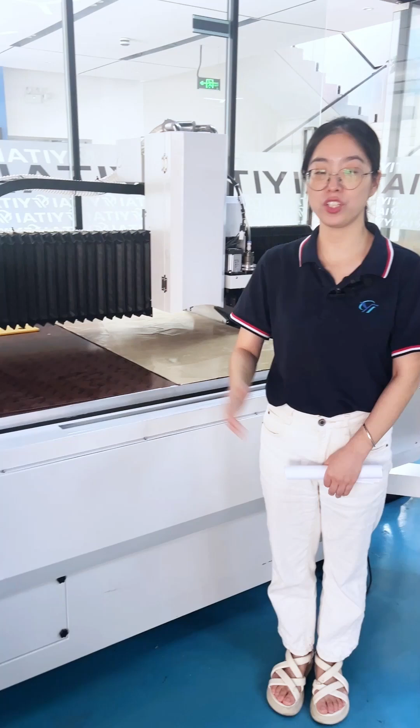Just now we did a live show and introduced our sandwich die routing machine. And now we continue to introduce its brother machine. Why call it a brother machine? Because both machines are for high precision dies. That machine can mill the steel plate, and this machine has a similar function and can process the pertinax, the rubber, and also the plywood. The non-metal materials for this machine.

If you are a box factory manufacturing cigarette boxes, pharma boxes, I mean medicine boxes, and cosmetic boxes, and if you are a die maker making dies for this kind of box, you may use this kind of machine. Our pertinax machine is mainly used to mill the pertinax. Except the pertinax, it can also mill the rubber and also the wood.

As time is limited, today we want to show you the details of how our pertinax machine cuts and mills the pertinax. Some may wonder what the pertinax is. In my hand, this is called the pertinax, and the brand is Reuma, made in Germany. Other brands are also okay, like Cito or other Chinese brands, both available for our machines.

The thickness is very thin; the normal thickness is around 0.5 millimeter, 0.6 millimeter, 0.4 millimeter. All these sizes are suitable for these machines. Before starting the process, I want to give a brief introduction about the whole design and structure of this machine. In front of us is the main body and the table of the machine. The table size is 1.1 meter by 1.1 meter. We customized the table size according to the normal size of the pertinax in the market.

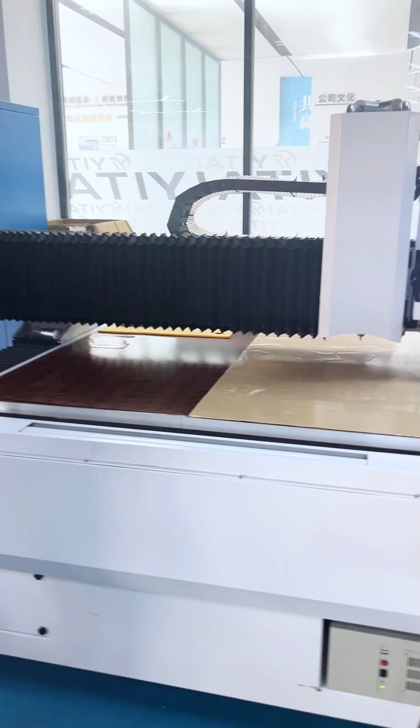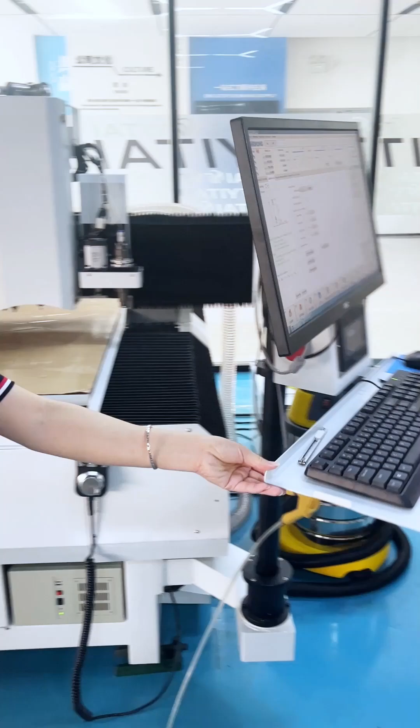This is the head of the beam. And this is the spindle. This is the cutting head for the rubber. And beside the table, this is the operation panel, which can rotate freely from different angles, according to the space of your room, with the monitor, with the keyboard and mouse.

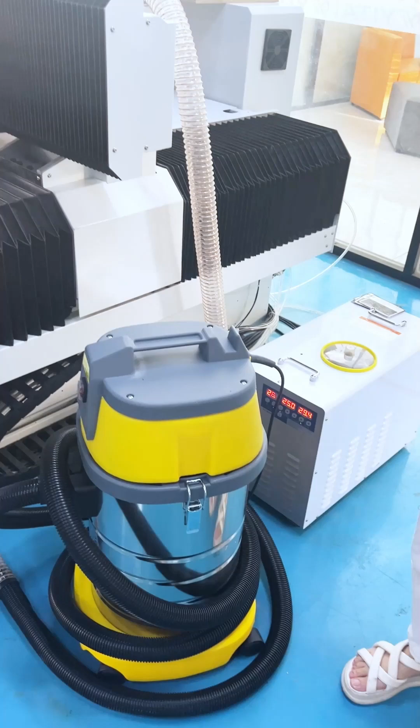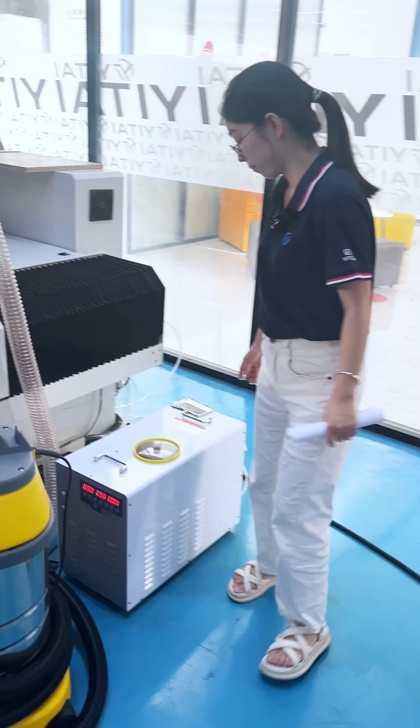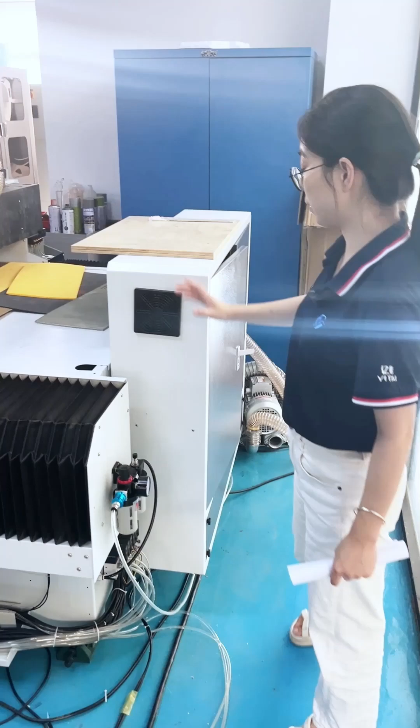And this is the dust cleaner to absorb the dust. Because during milling the pertinax or the plywood, there will be a lot of waste and dust, so we use the dust cleaner to clean it automatically. And this is the chiller for cooling down. On the back of the table, this is the electronic cabinet.

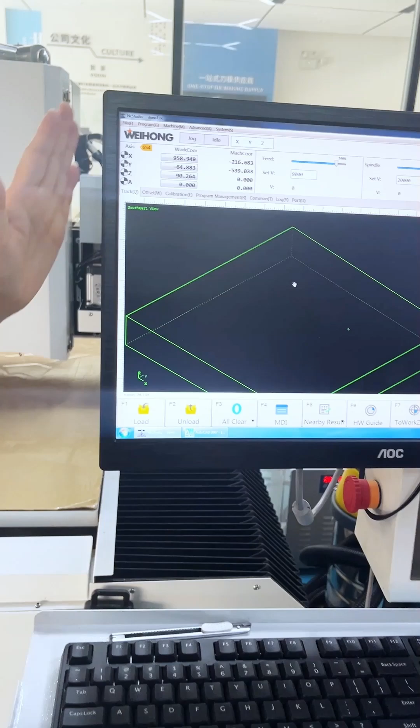The construction of the machine, I mean the components of the machine, is very simple, and it does not take too much space. So it's very convenient for the operators or workers to operate and it saves space. Now it's time to operate the machine. Our engineer will first show us how to load the file and input it into the software. This is the interface of the software. So we choose one file and open it to input it.

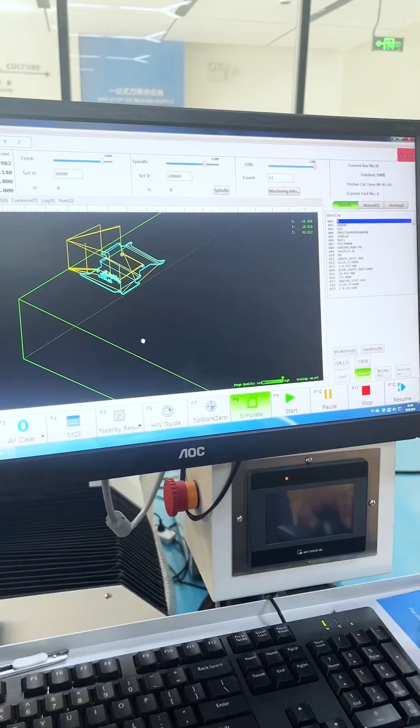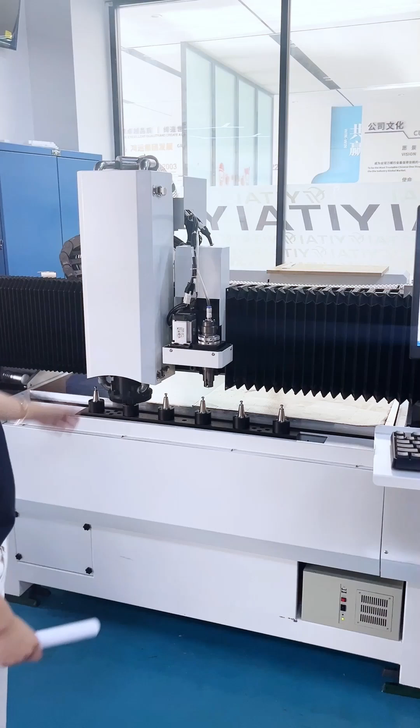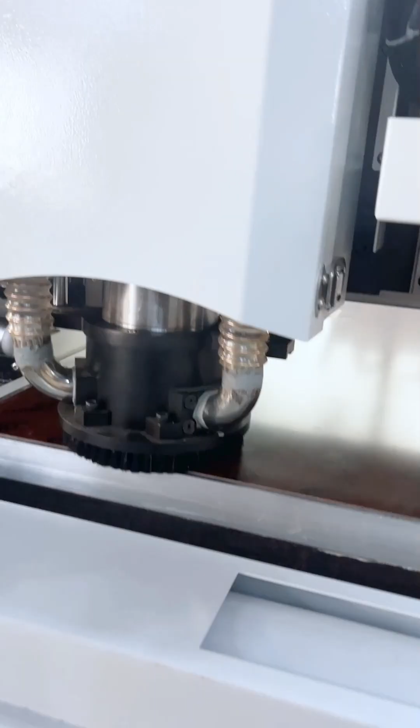This is the distance we set from the 0 point. This is the file which we already input. In the hand of the engineer is a control panel, which can control the moving of the head. Total 1, 2, 3, 4, 5, 6. Total 6 auto tool changers to change the tool automatically.

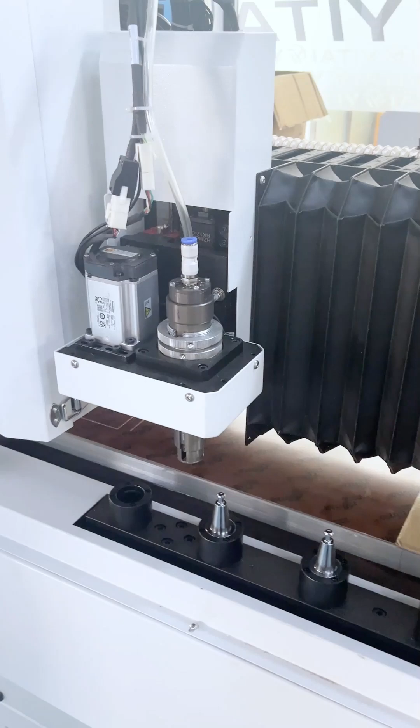The machine changes to another milling tool to continue with the second layer. We use the trimming blade to continue with the trimming process. The second layer finished. We continue with the third layer. This time, it goes back to the 0 point. The third layer is drilling the hole. Wow, it's very fast. The hole drilling process finished.

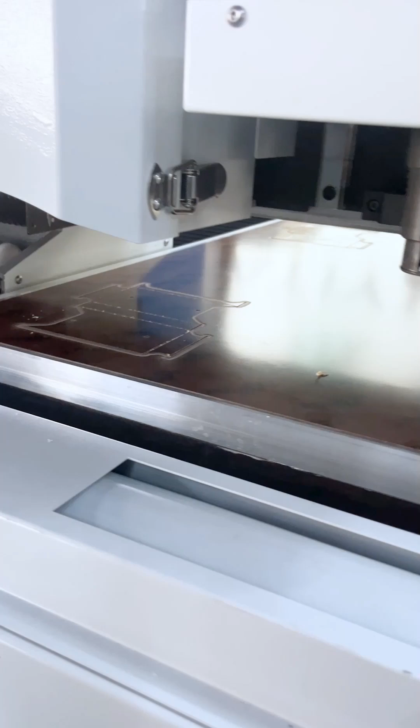We continue with the fourth layer. Go back to the 0 point and then start. Okay, we cut the hole. Now we finished the marking job.

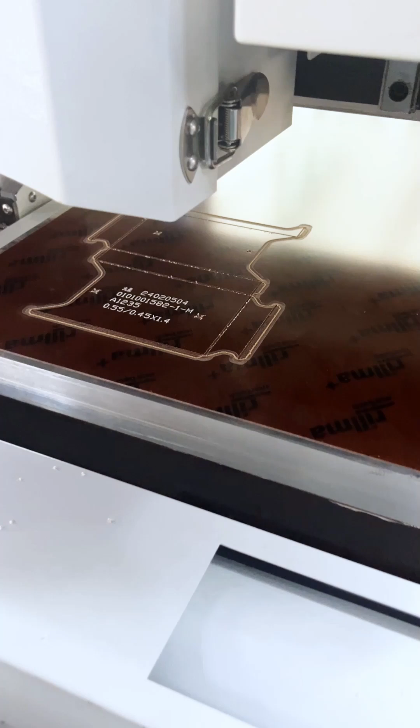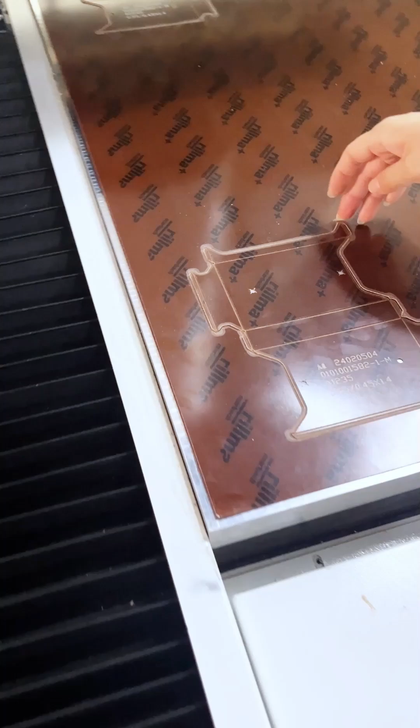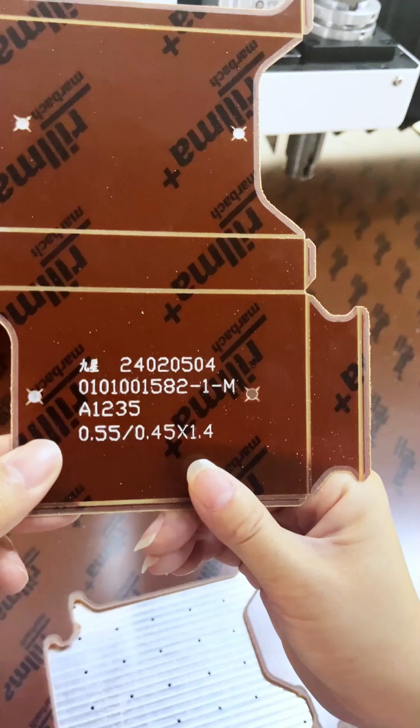Okay, one piece of pertinax sample finished. It takes 5 minutes and 15 seconds in total for one piece of pertinax. You can see the high efficiency of our machines. We can take it out to have a look at the pertinax we just finished cutting. This is the back side. You can have a close look at the line. We use different kinds of tools to process different layers and different lines.

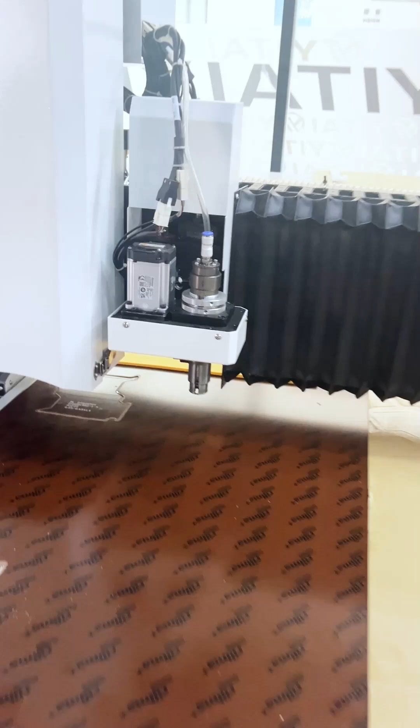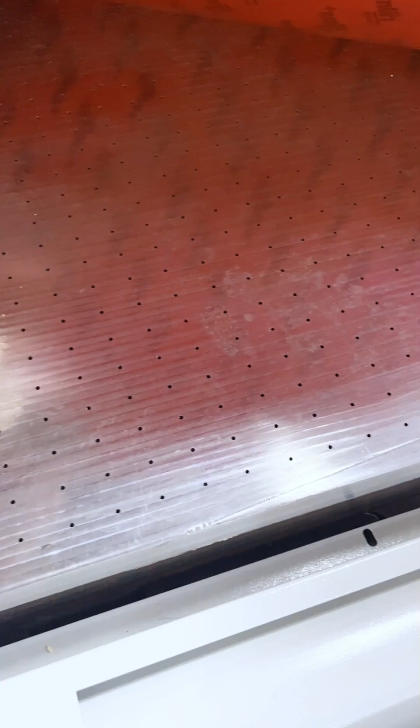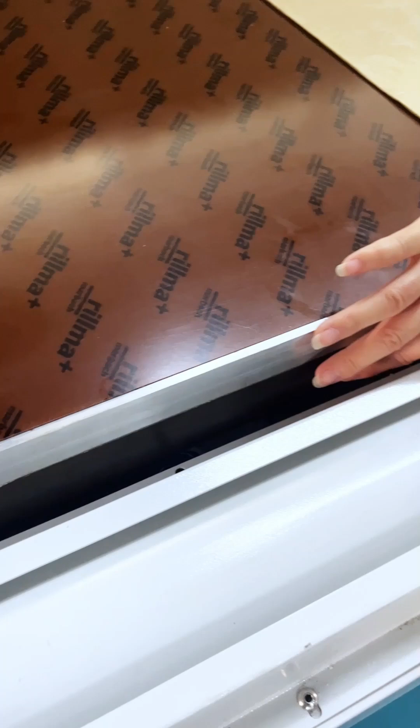And we can have a look at the detailed structure of our machines. The tabletop of our machine is aluminum, and the thickness is 50 millimeters with vacuum on the top. We can have a close look. And on the bottom of the aluminum table, it is marble, so we can ensure the stability and durability of the machine.

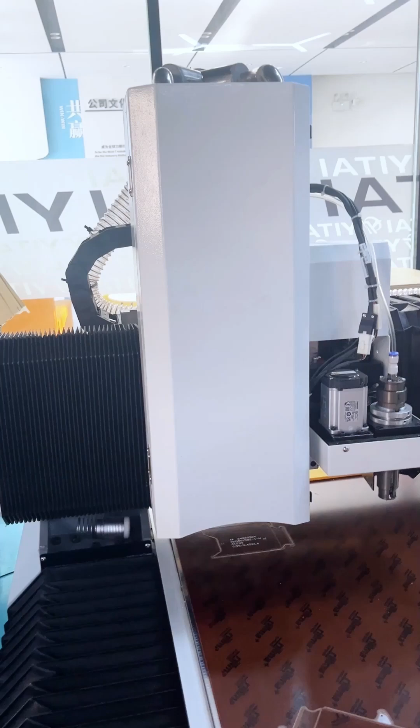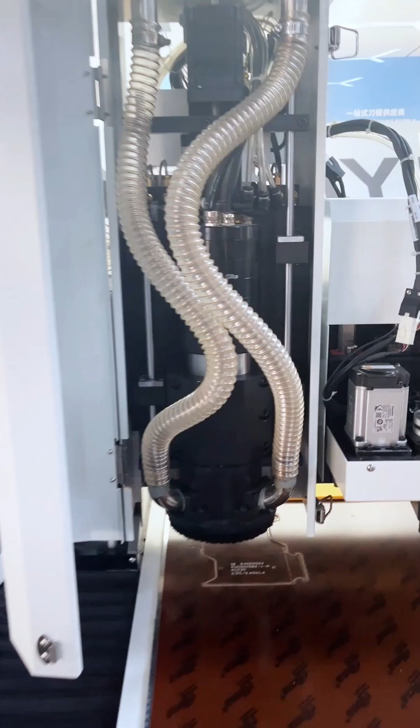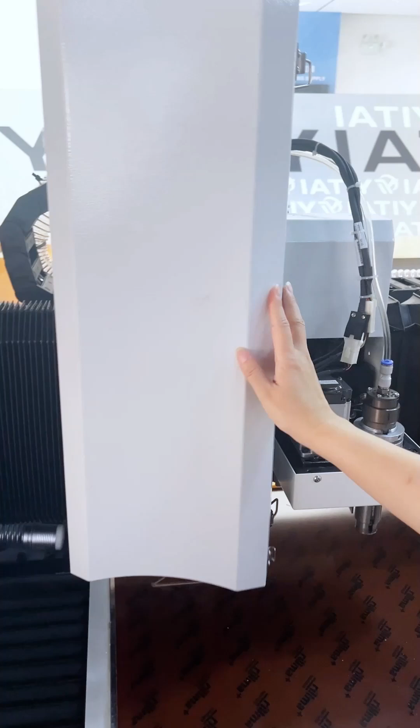This is the spindle of the machine. We can open the cover to have a look at the spindle. The spindle speed is 40,000 RPM. It's very high speed. We can have a look here. Beside the spindle is the oscillating tool to cut the rubber.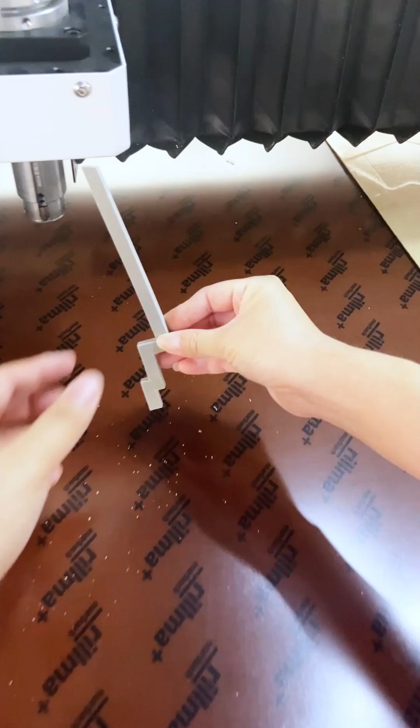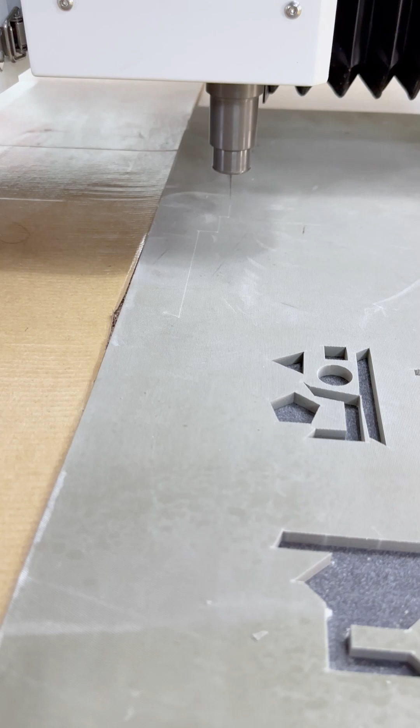And the drive and the motor. This is the drive and motor from Japanese Panasonic. This is a Japanese Panasonic driver to control the oscillating tool.

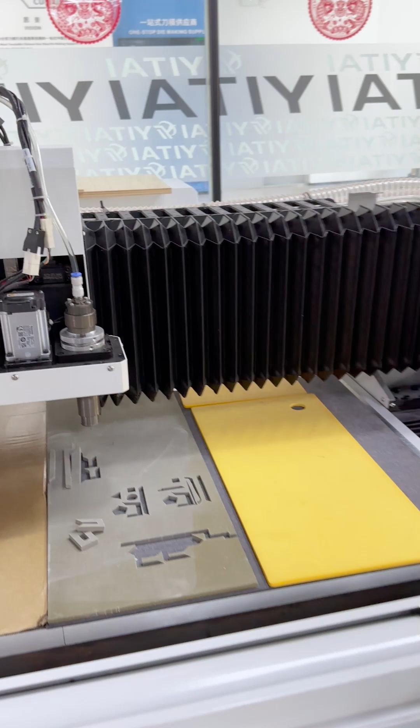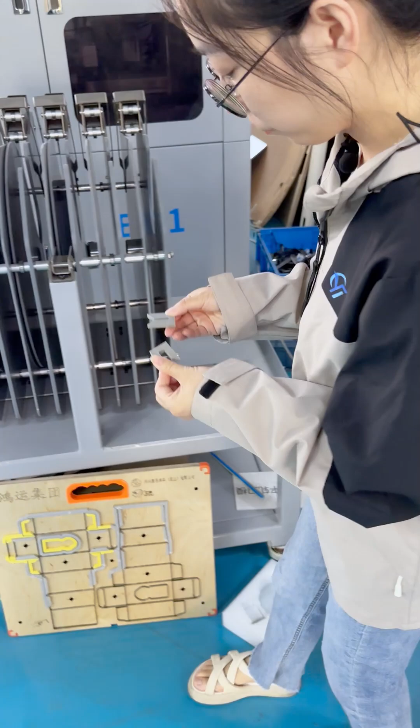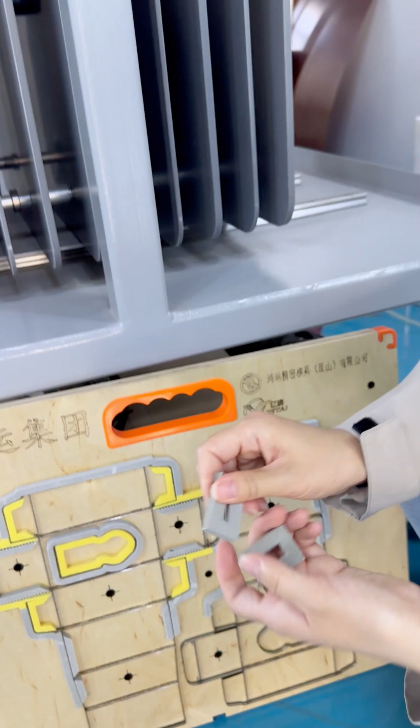Okay, we finished some samples cutting. These samples are very common and widely used for flat die making. And the thickness is 7 millimeter. The hardness is around 30 shore. And this slot rubber is also widely used. It's also 7 millimeter.

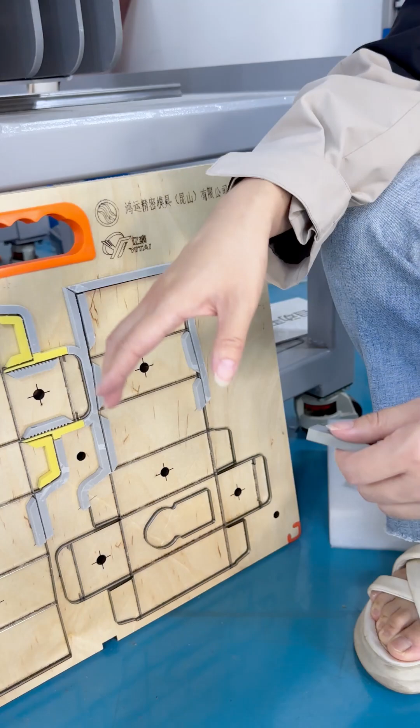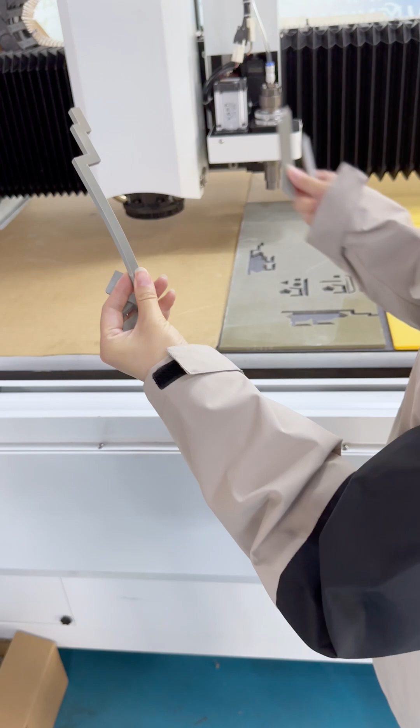And this is a little harder than this gray rubber. Both these two rubbers are very common and widely used for flat die making for the cardboard and food box. It's very small box. Different shapes and design according to the flat die box design. Yes.

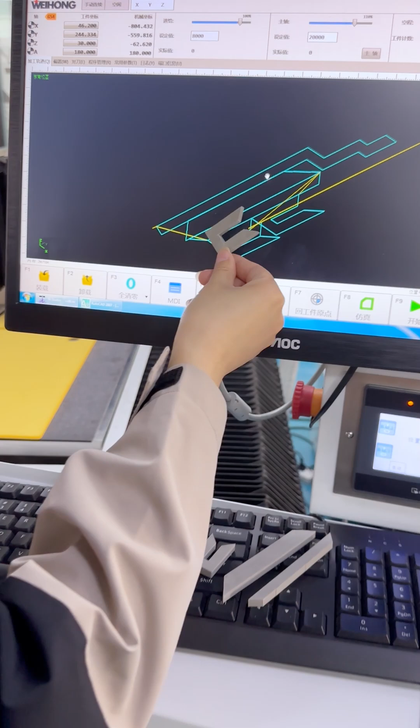They can run and cutting automatically to choose the path, cutting path. Yeah. This is this one.

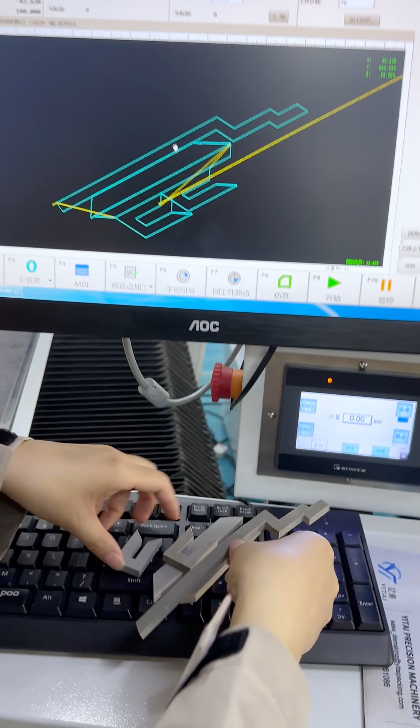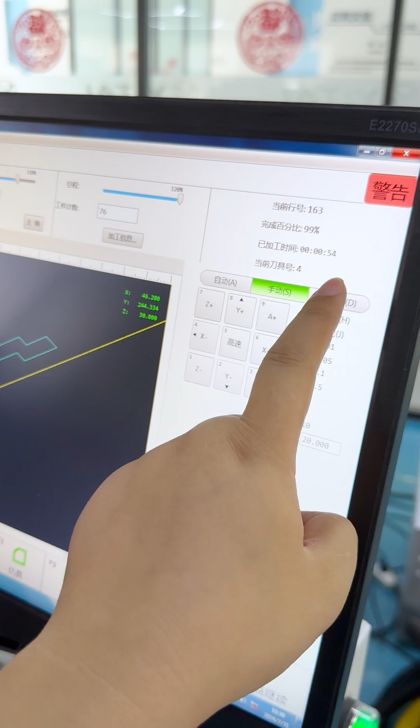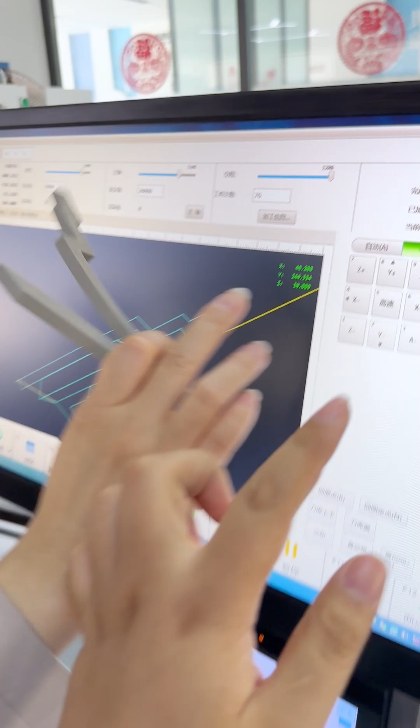Including the loading the file, the totally processed time is less than 1 minute, 54 seconds to finish this rubber cutting. So you can see that it's very high efficiency and high speed to do your job.

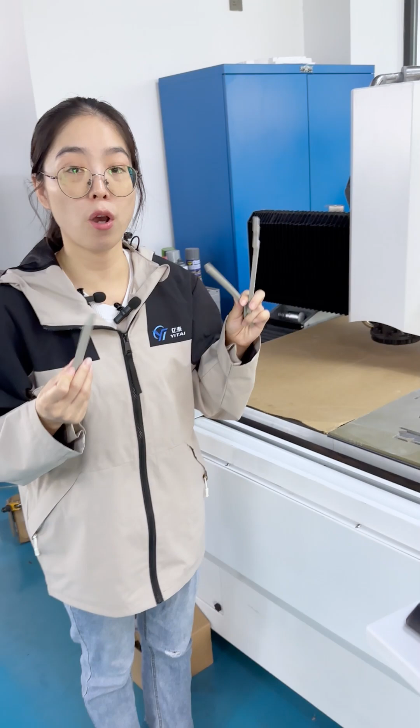In comparison with the traditional way, maybe you use the die mold to cut the rubber. Maybe you use the manual scissor to cut the rubber. So it's very waste of time. With our machine, you can cut the rubber very fast, very high efficiency job. At the same time, it's totally automatic and no need manual jobs.

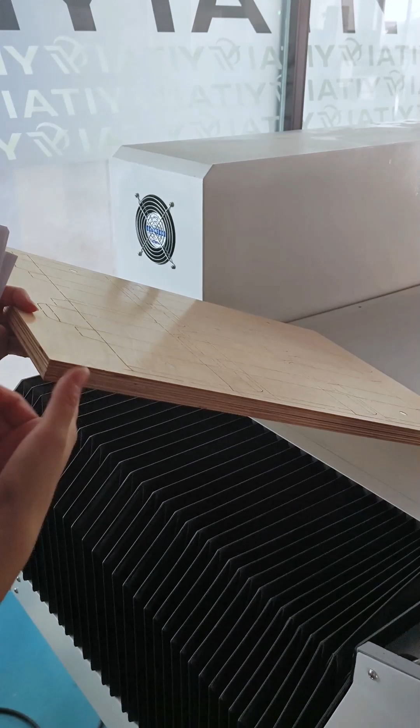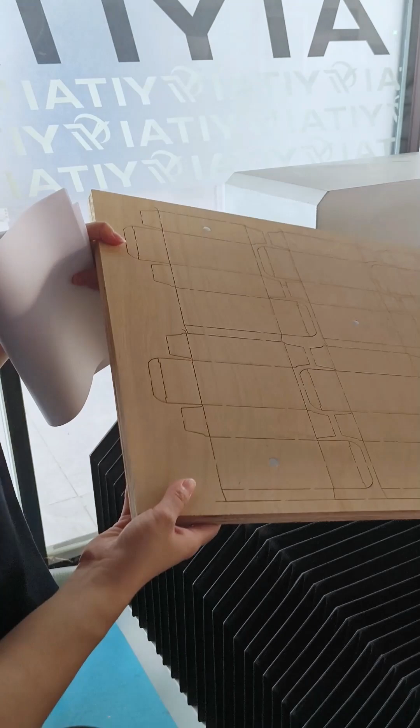Have a look at here. This is the finished plywood after cutting with this machine. The thickness is 18 millimeter, and it is combined with 2 pieces of 9 millimeter plywood. Look at the surface which cut with our machine. To be honest, the precision is much higher than the laser.

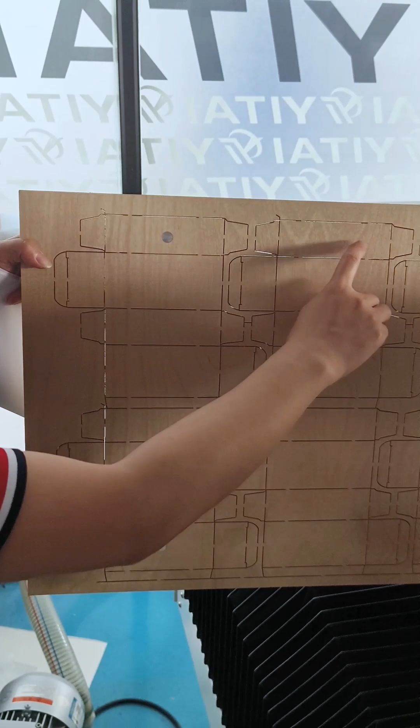And the curve line is very even, both bottom and the top. And the straightness is also very good and very nice. The surface is also very clean and beautiful in comparison with the laser.

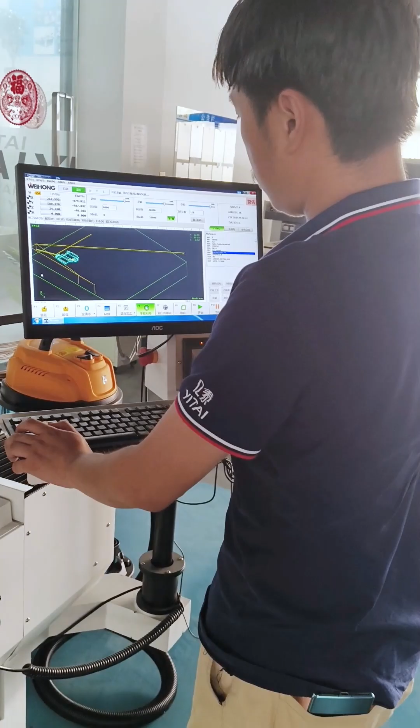Today, our engineer will show you how our pertinax cutting machine cuts the plywood. Now our engineers start to operate the machine to show you how it works. This is the control panel of our machine. You can have a close look at the cutting surface. It's very clean.

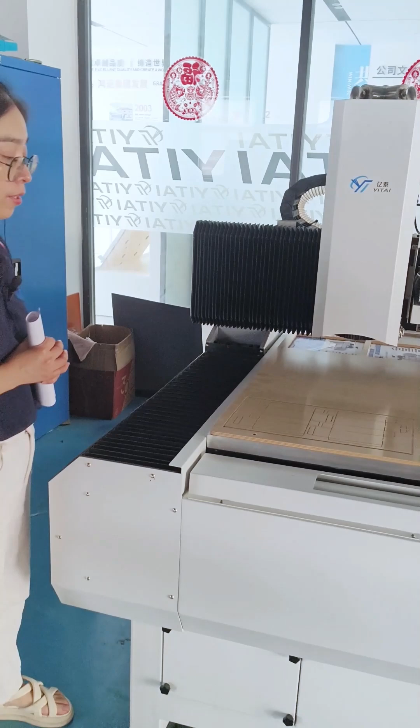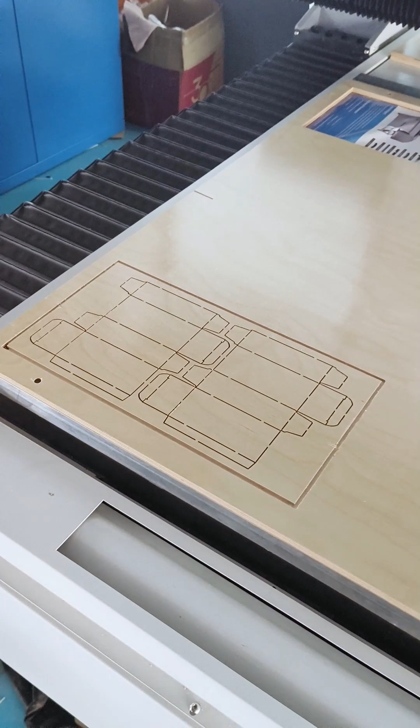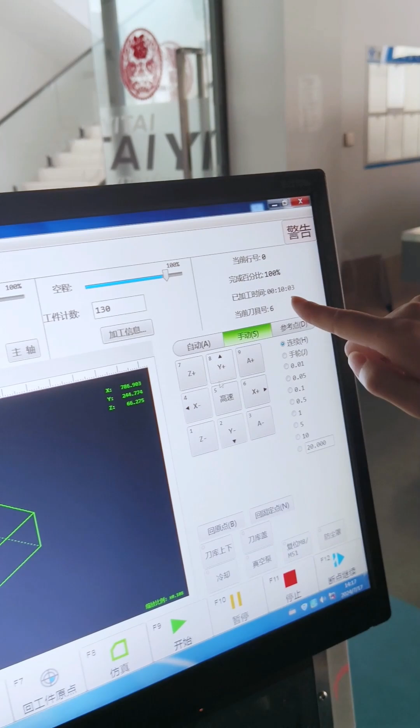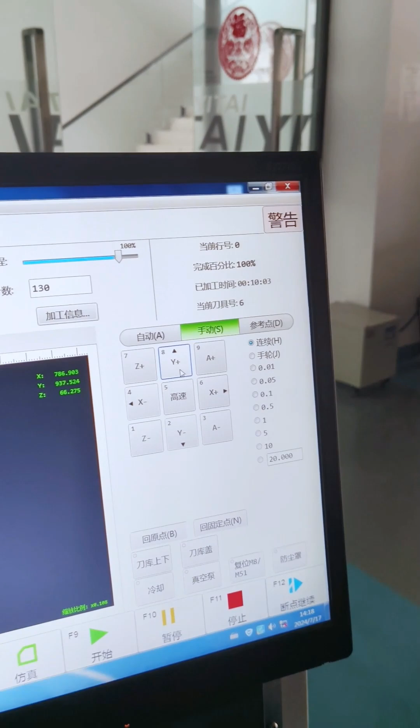Okay, so we finished this job. This box. Totally, how much time we use? We have a look at the screen. Okay, we can have a look at the time. To finish this die job, it totally takes 10 minutes. The front side 5 minutes, the back side 5 minutes. So it totally takes 10 minutes to finish the one die job.

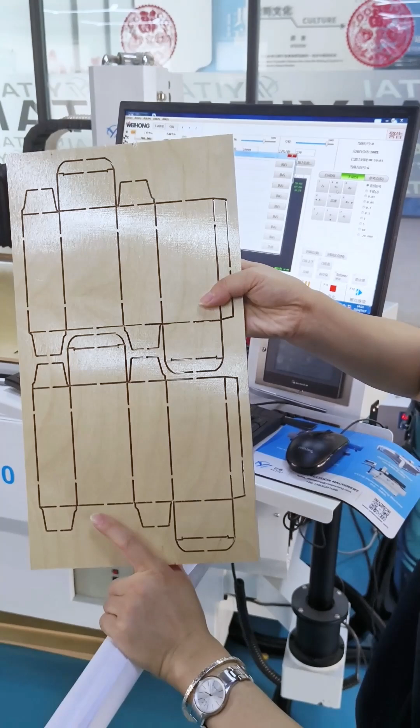We can have a look at the samples. This is the finished one. Finished jobs. We can have a close look at the cutting, the lines. The surface is very beautiful.

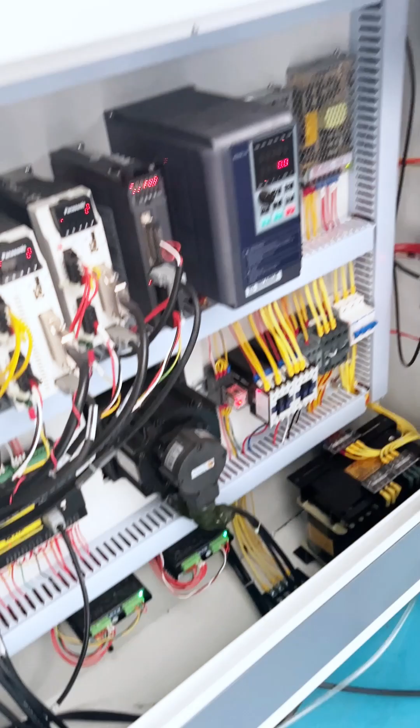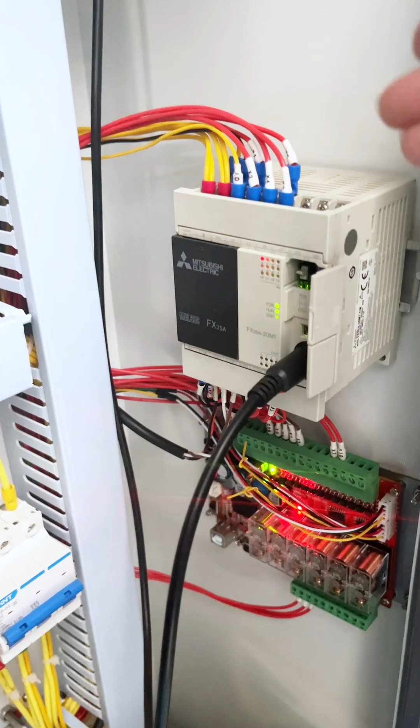We can open the door of the electronic cabinet to have a look at the details of the electronic parts. These are all the drives and motors, from Japanese Panasonic. And this is the PLC of our machine. It's Mitsubishi brand, Japanese Mitsubishi. And the frequency changer is the Omron.

So for all the key parts of our machine, we use the famous brand to make sure the long service and long lifetime of our machine. Both the hardware, the structure, the software and the key parts, we use the top brand and high quality. So for our machines, do not worry about the quality, the stability and the precision.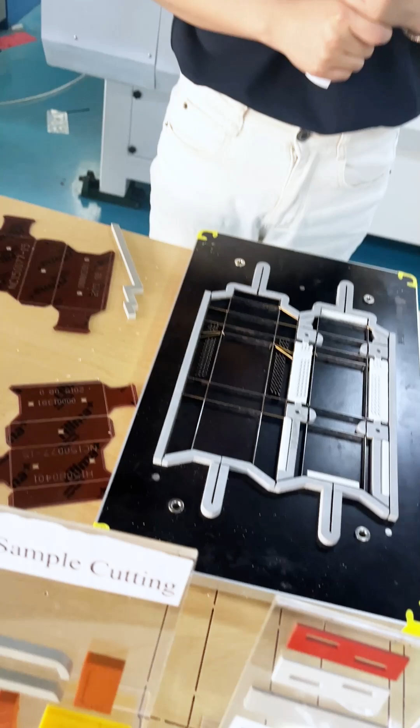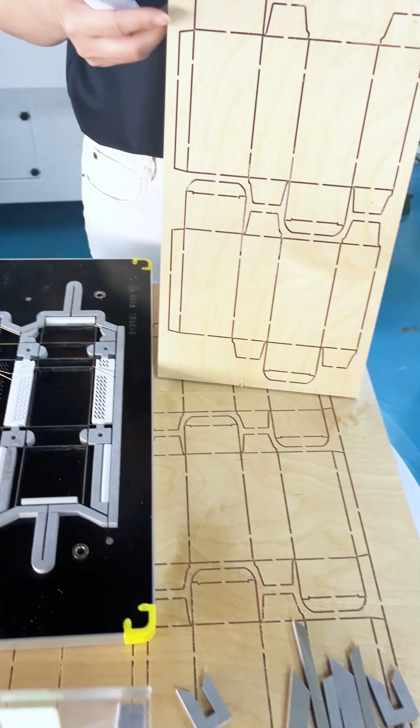So if you have any interest about the pertinax die making, I mean the counter die, the cigarette die, I mean the wood cigarette die, also the high precision dies of the wood, and also the rubbers, do not hesitate to contact us about the details.

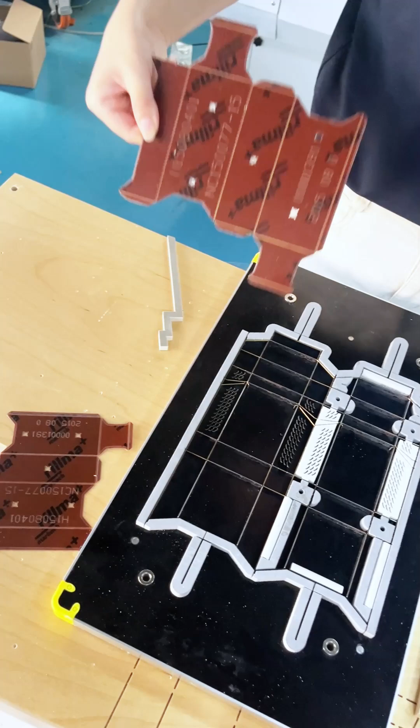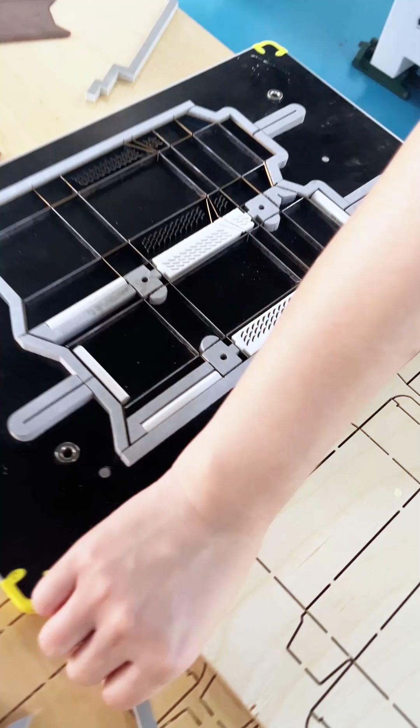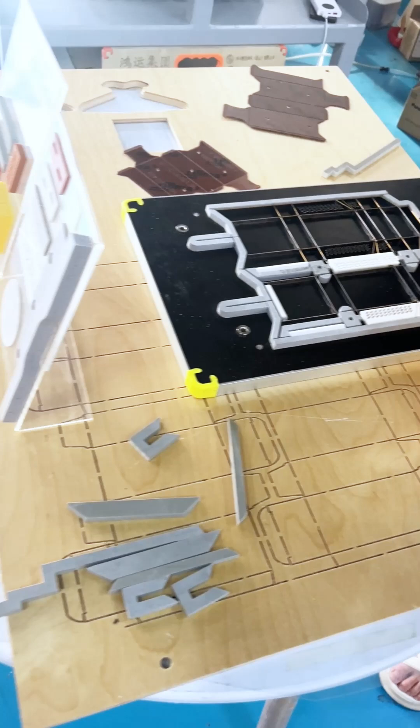This machine cannot only make the pertinax. Pertinax is the main job, but it can also cut the wood, and also the rubbers with different shapes and designs for the flat dies. This machine can mill the wood with maximum thickness 9 mm. We use 2 pieces of 9 mm plywood glued together to make the whole thickness 18 mm.

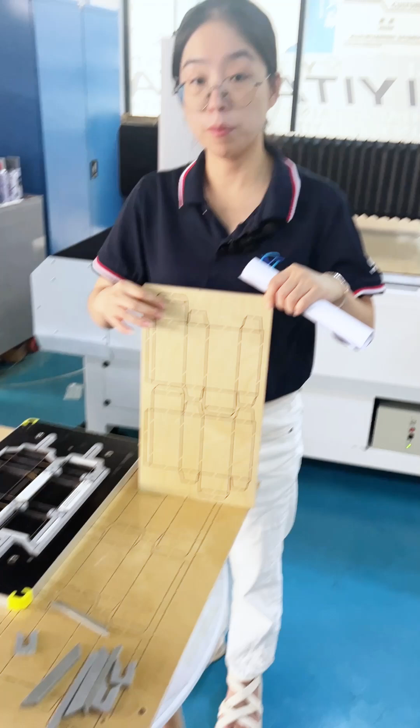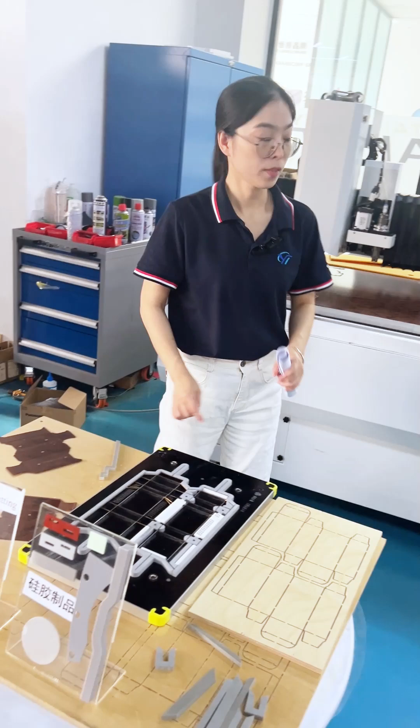The precision of the plywood is very high because we use the milling cutter instead of laser. Okay, that's all for today's introduction about our pertinax machine to process the pertinax. Next time, if you are interested in the details of processing pertinax or plywood, we are also very glad to further introduce to you.